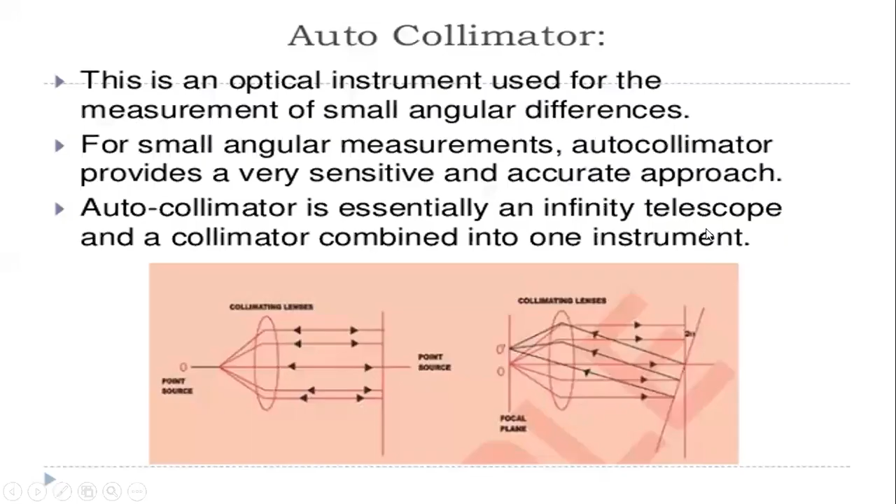So the topic is the alignment test on the milling machine, which is of the knee type, that is in the horizontal and vertical position, so that in these two positions.

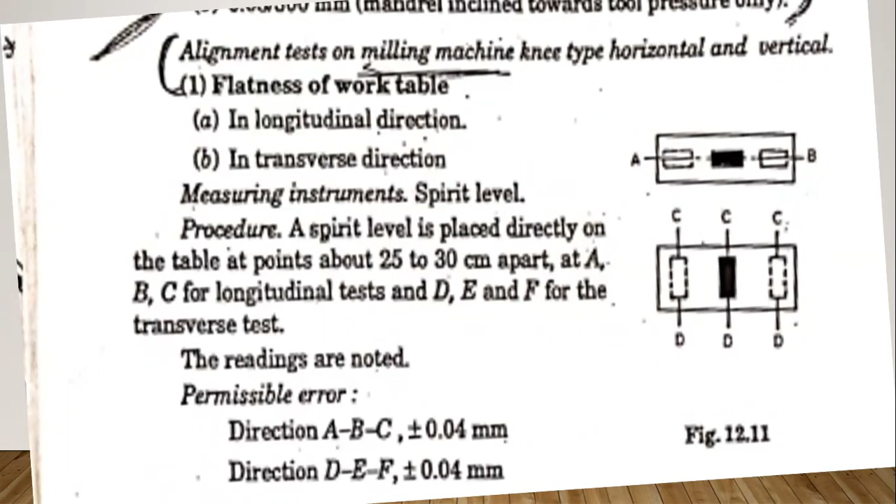The second step is to check the parallelism of the work table surface to the main spindle. It is used to check the parallelism of the work table to the main spindle.

The measuring instruments to be used are: first, the dial indicator; second, the test mandrel, which is 300 mm in length; and the spirit level. So these are the three measuring instruments to be used.

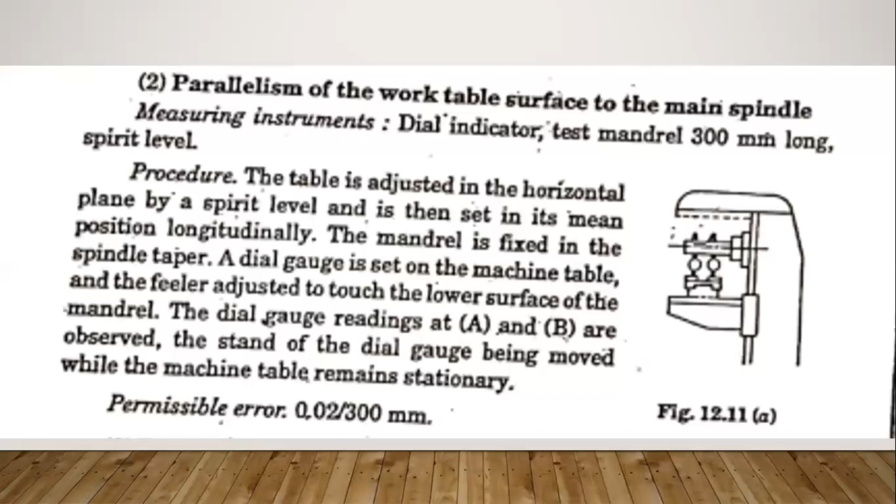Next is the parallelism of the clamping surface of the work table in its longitudinal motion.

The instruments used in this parallelism of the clamping surface are the dial gauge and the straight edges.

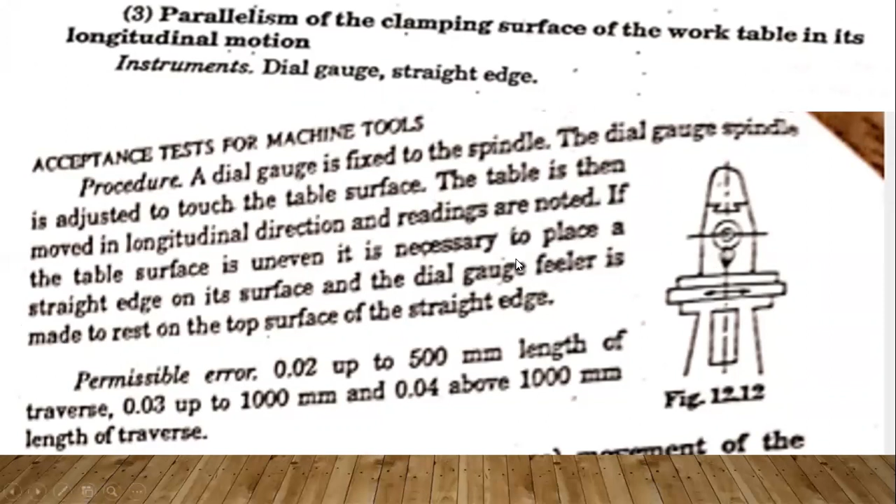Next is the parallelism of the transverse movement, that is the cross movement of the work table to the main spindle. You have to check it in two planes, the vertical plane as well as the horizontal plane.

The instruments used are the dial gauge, test mandrel, and the taper shank. So these three are the instruments they have used.

That is for the instruments used. Then we have to take the procedure of the instruments. First of all, the work table is set.

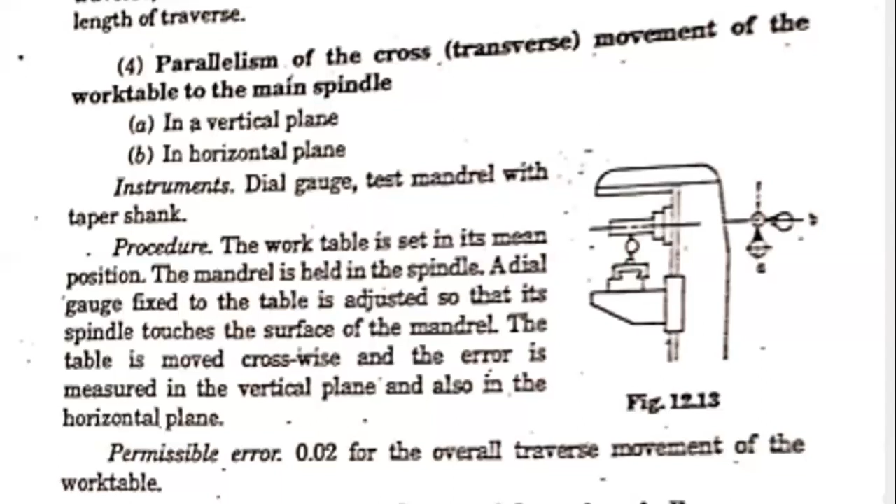Next one is the true running of the internal taper of the main spindle. So for the main spindle position, you have to set the true running for the internal taper.

The instruments to be used are the 300 mm long test mandrel and the dial gauge. These two main instruments have to be used for testing the true running of the internal taper for the main spindle.

Then the procedure: the test mandrel with its taper shank is held in the main spindle. So you have to first fix this test mandrel in the taper shank, fixing the spindle in the taper shank.

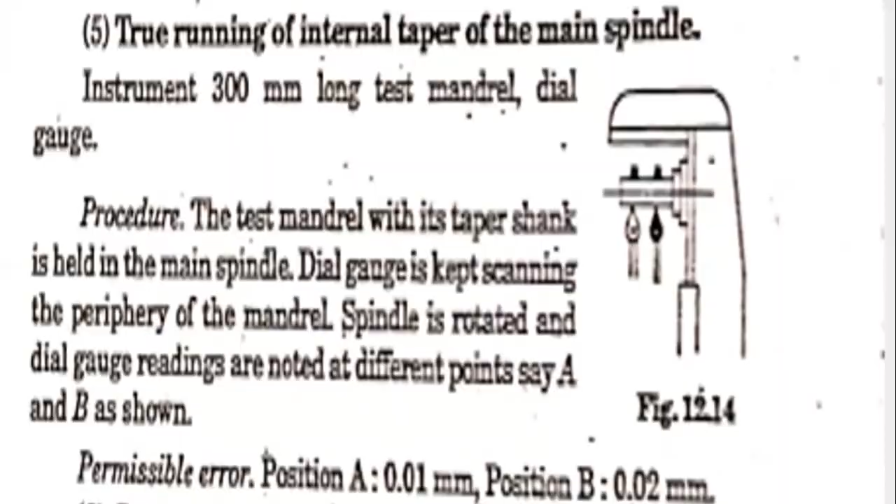Next one is the squareness of the centers - squareness of the center T slot of the work table with the main spindle. You have to check this for the main spindle.

Here the instruments to be used are the dial gauge and the special bracket. This is the special bracket which is fixed in the T slot position.

Then we go to the procedure. To check the perpendicularity of the locating slot, the main spindle is used as the axis. When it is in the center position, we take the axis of the main spindle, and the table should be arranged in the middle position of its longitudinal movement. You have to fix the middle position of the longitudinal movement of the table with a bracket with a tenon at least 150 mm long. This is the tenon, which has a 150 mm length bracket, and which is inserted in the locating slot.

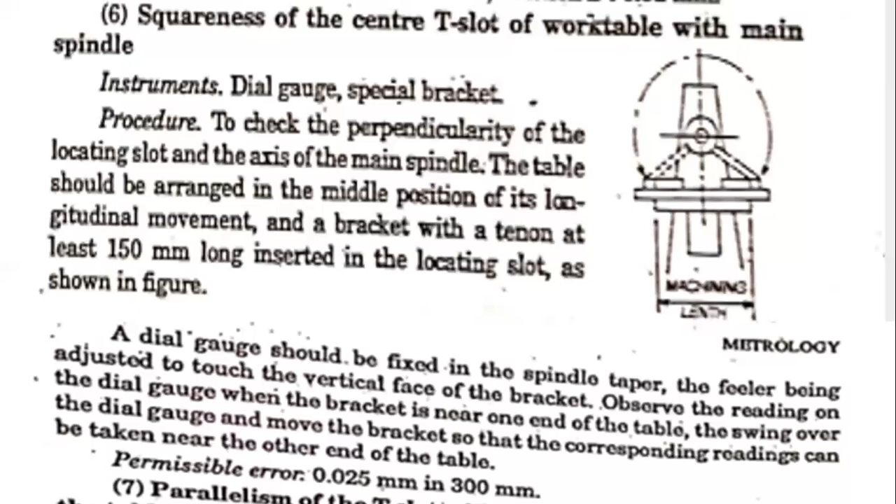Next one is the parallelism of the T slot with the longitudinal movement. The instruments used in this alignment test are the dial gauge and the special bracket. This is the special bracket to be used.

So in this alignment test also, the general parallelism of the T slot has to be used in the longitudinal movement of the table, and this should be checked by using a 150 long bracket having a tenon which enters the slot. So this has to be moved in the diametrical section, and a tenon is used to enter the slot.

Then the dial gauge is fixed to the spindle taper and adjusted with its feeler gauge, and the gauge is used to touch the upper surface of the bracket. Here you can see the brackets, two brackets attached on the table or placed on the table. Then the table is moved in the longitudinal direction while the bracket is held stationary.

So we have to fix the bracket by using the hand of the operator, and the dial gauge deviations from the parallelism are noted down. So here it is used to note down the readings from the parallelism of the table.

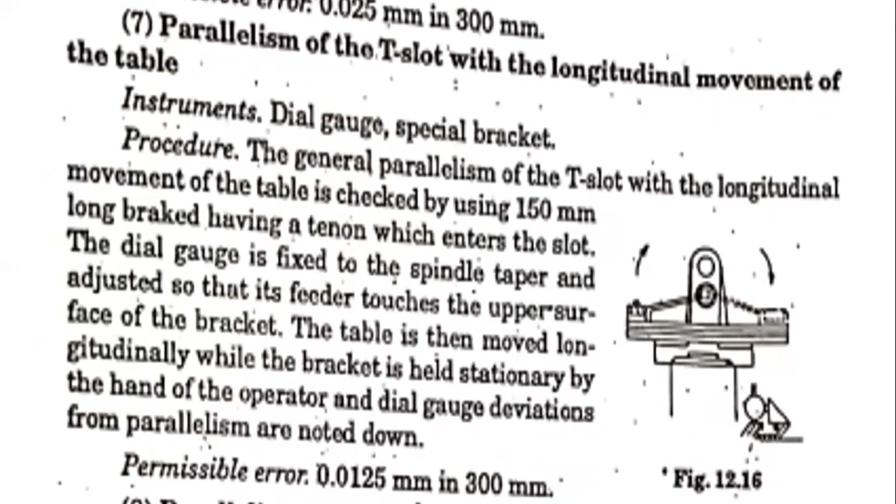The instruments used in this alignment test are, first, the dial gauge, and second, the test mandrel. The dial gauge is the common measuring element used in every alignment test except the flatness of the table, that is, the installation of the table.